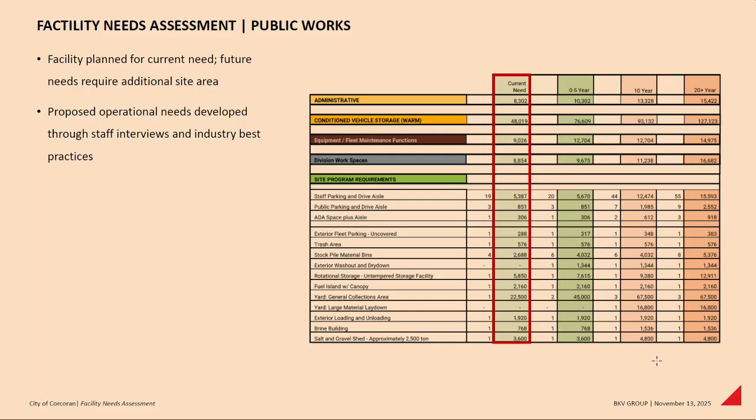We discussed these needs with staff, with Kevin, Joe, Pat, and other staff members to understand what they saw as needs for their facility. This program is really a staff-centered program.

Similar to Public Works, we met with staff and developed growth projections for both their current need and out to 20 years for both City Hall and the Police Department. For our master planning process, we are planning around the 20-year need.

For a combined city hall and police facility, we identified roughly an 86,000 square foot building requirement. There's also an additional cold storage facility for police equipment, which would be about 2,000 square feet.

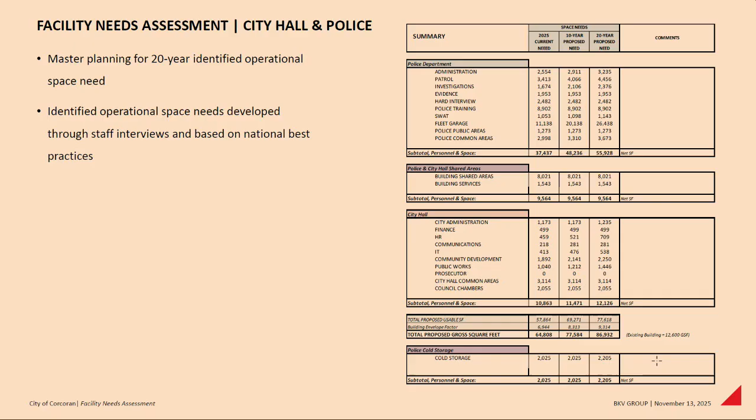Back again on Public Works.

For master planning on the Public Works site, we really looked exclusively at what can be done on the existing property. Within the program, we identified a shortage of about 55 to 60,000 square feet within the facility. The current building is somewhere between 24 and 28 thousand square feet, depending on how you level the multiple storage levels.

That facility was really designed to be just that size. It's served through well, and also through a septic system, and those systems were sized for strictly that building size with fire suppression and water demands. So really the expansion of that existing facility is limited if municipal utilities are not likely deliverable to that site within the life of the property.

So we really looked at a handful of options, but this particular master plan does realize that there is a potential feasibility that the septic field can be expanded to house and allow additional office and personnel demands, as well as there is a feasible possibility that a second well could be on site to serve a newer facility. Because of fire sprinkler demands and building code requirements, it would be best to keep these buildings separate, so we didn't trigger any kind of additional parameters within the existing building.

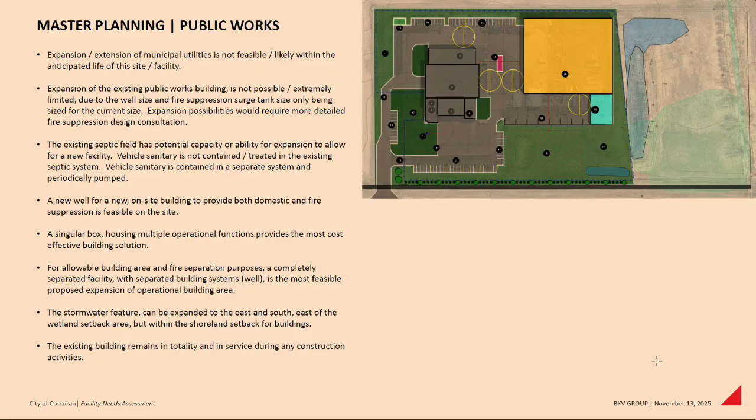So this just captures, could we, if we had all of the resources that we need, make it happen on this? For our bare needs right now, we could, but that's why it's not broken up into all of the different boxes, because we wanted to cover the square footage at a macro level, and then in this next phase, dig into, alright, what do we need specifically? When does it make sense for us to pursue that need? There's one more slide, Jane.

Yeah, so this is just a little bit closer in to illustrate what is existing and then what we would be proposing new. So the big yellow box is that conglomeration of multifunctions, whatever it would be determined. And then also the miscellaneous site functions that would help support that facility in the Public Works and Utilities departments.

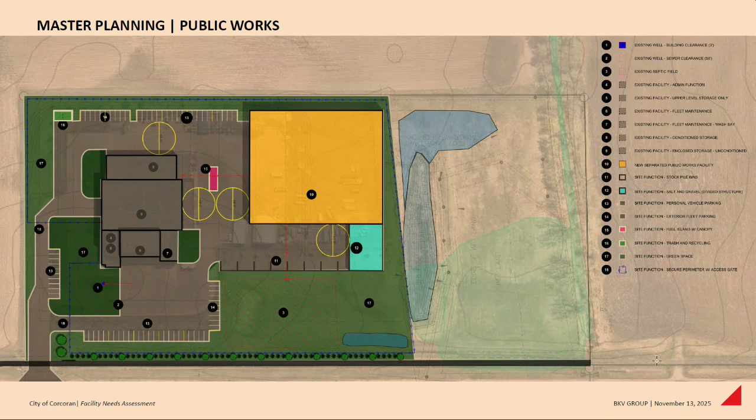Good job adding that. We don't want to leave them off, so great job.

So for the City Hall and Police facility, this is the same master plan you saw previously, but this is one of the two options we looked at, and the one we're proposing moving forward as a recommendation. The second option was over at Heritage Park on the north side. This one is just down the street at the city center.

This site has good access to utilities. It has a great presence within the future development of the city center itself, and also has a nice walkable neighborhood feel to it. The master plan includes a two-story facility with City Hall and Police, and a lower level with a lot of garage space for police and their equipment, storage, support spaces like locker rooms and other storage areas that don't need daylight access.

We're proposing to have some of the public parking facing south, which could potentially be expanded and connected with any other future development south of the parcel. On the north side, we're showing a secure parking lot for staff and police operations on the back side of the site. On the very north side of the building is where the garage tucks under to access the lower level, which naturally follows the topography of the site, utilizing the hillside to slope down to the stormwater area.

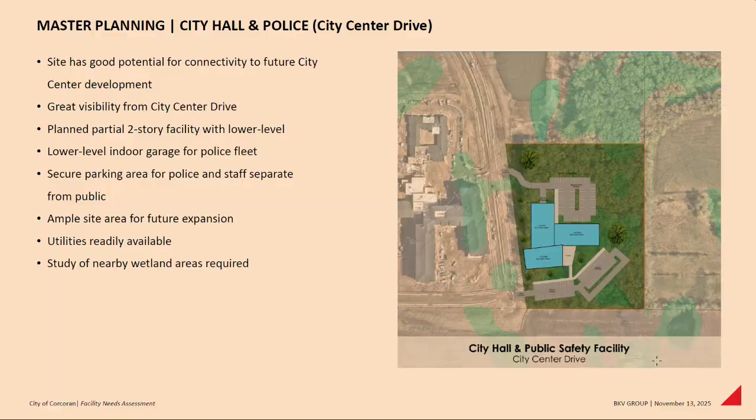We can go to the next slide. It's just a larger view again. We can go to next.

I wanted to remind you that we did look at the fire station, and we were looking at this current site where the city hall is for a future fire station. The site does work well through this feasibility study. We determined it was best positioned on the southern side of the parcel, allowing public access up City Center Drive while still having the apparatus bays with quick response out onto 116.

This shows the opportunity for the fire station to grow to the north. As needs change, you can add additional apparatus bays to store other equipment and response vehicles in that area.

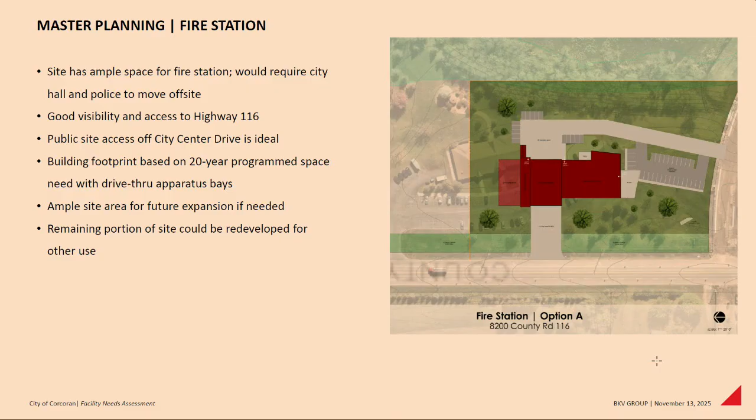Mike, I'll let you talk about the costs if you will. We got Mike Phillips from Kraus-Anderson, he's going to talk about costs. Thanks for the introduction, it's great to be back.

Let me go ahead and pull up the summary budget. Bear with me here one second.

When I was here last time, we walked through high-level budgets for each of the options, starting with the new city hall and police station, to give a little additional context. Working off the space programming you just heard from Mike Healy and Andrew Cooper at BKV, and using past project history at a concept level, which is where we're at currently, we look at space in terms of blocks and certain types, and based on similar project history, come up with unit prices that are typical, then provide ranges for that.

So what you're seeing here is the midpoint of those results. To that third bullet point about soft costs, we price the hard construction costs as well as the total project costs, which include soft cost items such as design fees, construction management fees, permits, inspections, utilities, and all of those sorts of things. So you're looking at a holistic project budget.

For the new city hall and police facility, that's approximately an 87,000 square foot facility with anticipated site acre impact of roughly 3 to 4 acres. You can look there at the line: construction costs are projected at just north of $40 million, with soft costs approximately $8 million. Anticipated total project cost in 2025 dollars is 48.5 million, and you can see the anticipated escalation below that for 2026 and 2027.

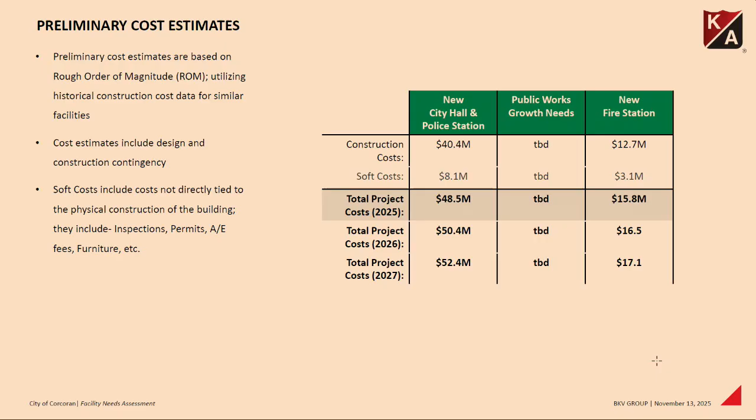All right, Paul Michelle, partner with BKV Group.

Part of the packet is our proposal for the Phase 2 services, so I'll summarize what those are. We're going to start refining what those needs are relative to what funding can be achieved for the City Hall, Police Department, and Public Works project. We'll go through a visioning exercise and develop concepts, which could be more refined site diagrams, site test fits, conceptual massing, and what the vision of the building could be. Not necessarily a final design, but as we look toward community engagement, you'll need materials to inform the public of what's required and what they could be deciding upon.

Validating the City Hall, Police, and Public Works space needs is the first step. Then refining what the master planning approaches would be, how you might phase the work to meet various budget thresholds, what those concepts could be, and then really engaging with the community. We had a total of 7 community engagement workshops as part of that, in order to work with the public and solicit their feedback. We can take that feedback and refine the final results of Phase 2.

Developing the implementation schedule and financial plan is the last part of that. Ultimately, through the community engagement, education, and materials, you want to present a picture to the public of what the investment will really look like and what they would be getting for that investment.

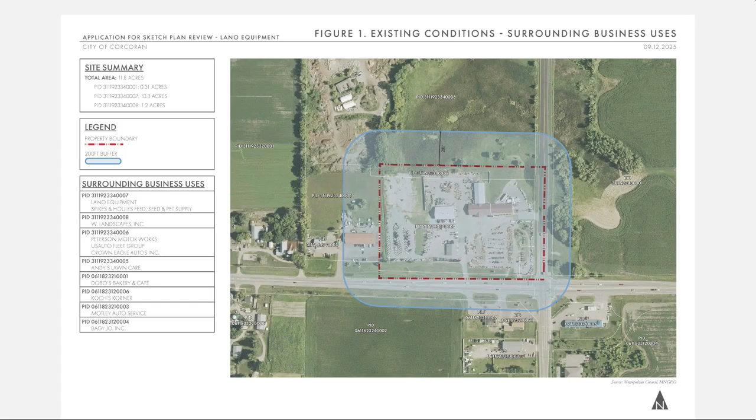This slide is a good one because it shows the property to the north, and they would acquire a portion of that property. So they would plat that property with the two properties they own and create a new parcel for Lano, and Spike's down to the south.

Next slide. That blue circle shows the 60 feet they would acquire from the property to the north, resulting in an 11.8 acre site when they're done. So the new building is in the southeast corner.

It's a 54,800 square foot building. And then in the center of the site, there's an existing 6,600 square foot storage building that was approved in 2013. And around that is about 4 acres of fenced outside storage.

There's parking on the southwest corner. That pond-looking thing is the septic system. There's another septic system on the north near the stormwater pond. And then in the corner of the site at 19 and 55, there's some additional parking up against the building and then a display area.

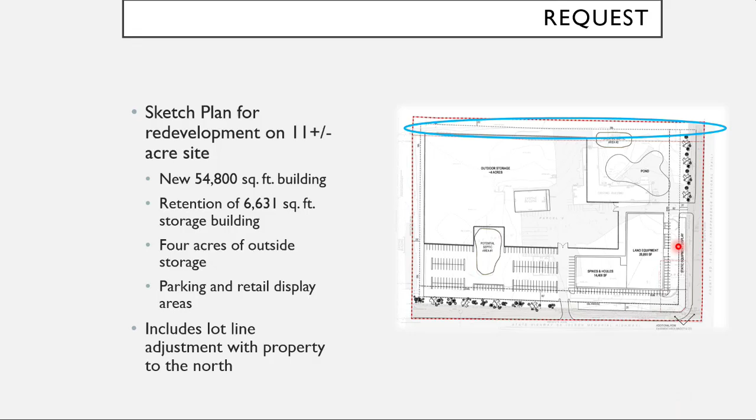We'll talk about each of these individually through this report. So the business is a legal non-conforming use. Businesses similar to this have operated on the site for decades, and when Lano purchased the property in 2005, they came to the city and got a letter acknowledging the legal nonconformity of the use and some of the constraints that existed, discussing with Brad Lano and his attorney what those constraints were.

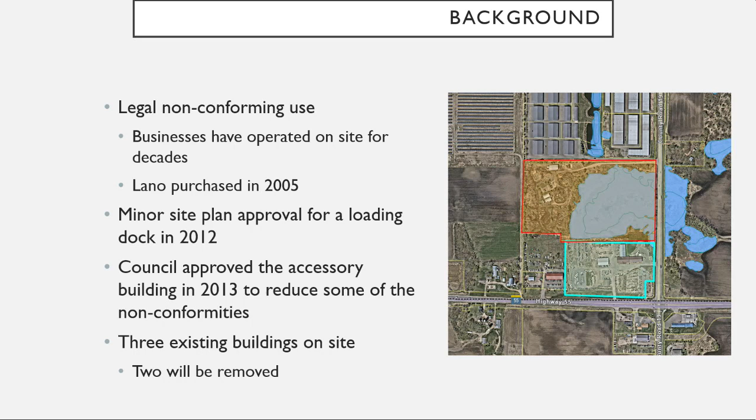In 2012, there was a site plan approval from the city for a loading dock expansion north of the building. Then in 2013, the accessory building was approved, in part to reduce some of the nonconformities, because building that building would allow them to move some of the things that were outside into that building. That building will remain with this new redevelopment proposal. The two other buildings on the north side of the site, south of the storage building, would be removed.

Next slide. The property is zoned C2. C2 is intended to provide for a variety of retail businesses. Retail sales are permitted, which is what is happening at the Spike and Houles business. But equipment sales, repair, and outside storage are not allowed, which is what's happening at the Lano business. So it's allowed to continue in the way it was in 2005, and then modified in 2013, but could not expand. Those uses would be allowed in the light industrial district.

In the staff report, I talked a little bit about the unique mix of uses, and there's a couple ways to deal with that. The applicant could move forward with a zoning text amendment to create a new zoning district, or modify the C2 district to allow outside storage and equipment sales and repair. That doesn't feel like the right fit for a retail site.

I actually can't think of where I've ever recommended this, but perhaps a PUD in this case might be a better solution than creating a unique zoning district, because at the end of the day, that's what a PUD is—it's a unique zoning district. Next slide. So the concept plan would house both businesses in a single building, similar to as it is today, but does allow them to expand and modernize their businesses.

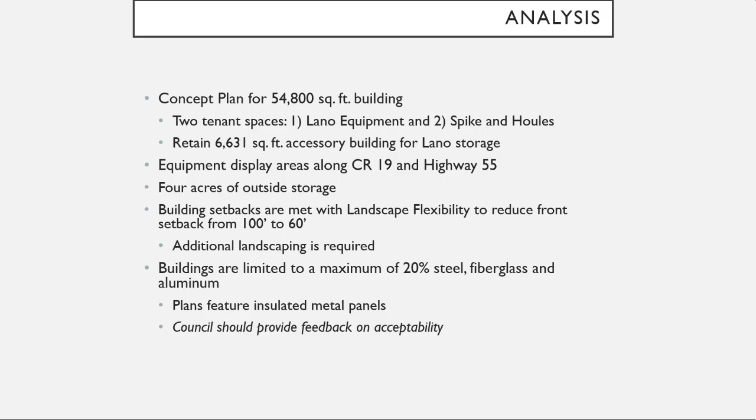The building concept is included in your packet. I wanted to highlight the fact that buildings are limited to a maximum of 20% steel, fiberglass, or aluminum. The plans feature insulated metal panels, which is something you've seen in a couple of other PUDs. I think this is one where it warrants some feedback from the council about whether that would be supported, and I have some imagery on the next slide.

So this is the site plan again, and this is some imagery that's in your packet. Much of the building is a flat metal insulated panel — kind of a modern-ish construction method. There are some ribbed panels shown on these concepts, and again, these are not final drawings by any means, and the applicant could maybe provide more feedback.

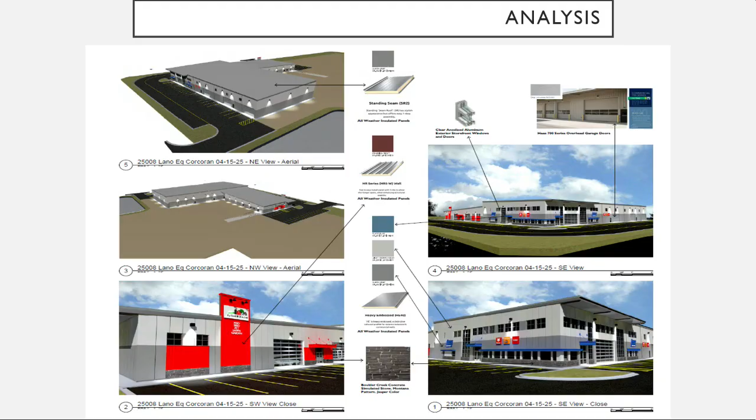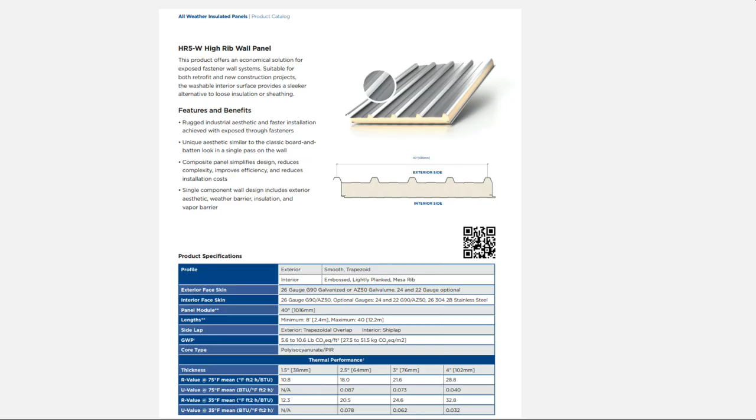The next slide is not in your packet, but provides some information, and some of you may have looked at this about what it is — it really is a metal face with an insulated material. Compared to a typical agricultural building metal siding, this is a little bit different. This is the ribbed panel I'm showing; they also had some flat panels, and the applicants are here to maybe talk more to that. But I think that's an important element because it does not technically comply with our code today.

For parking, the applicant's plan provides 210 stalls, where 206 appear to be required — again, concept plan level, so there's a lot of finessing that would need to be done. But the code requires that all parking and sales display lots must be asphalt or concrete with concrete curb. I'll just mention that's an improvement from what there is today, since as you probably know, that's gravel today.

The parking and display areas do not meet the setback requirements along either 19 or Highway 55, and in fact the display areas appear to be on or in the right-of-way. Our code allows the applicant to reduce the 100-foot setback to 25 feet from the property line, but does require that same additional landscaping you're familiar with for the reduced setback.

What maybe is a little bit different for this business than some other businesses in town is that display area is a critical part of their sales business, and so the council should discuss any potential for PUD flexibility if they go that route regarding those landscape requirements, which are fairly significant in order to get that reduced setback. But when you look at the 11, 12-acre site, it does seem very feasible to shift that building to the northwest 25 feet to comply with those setbacks.

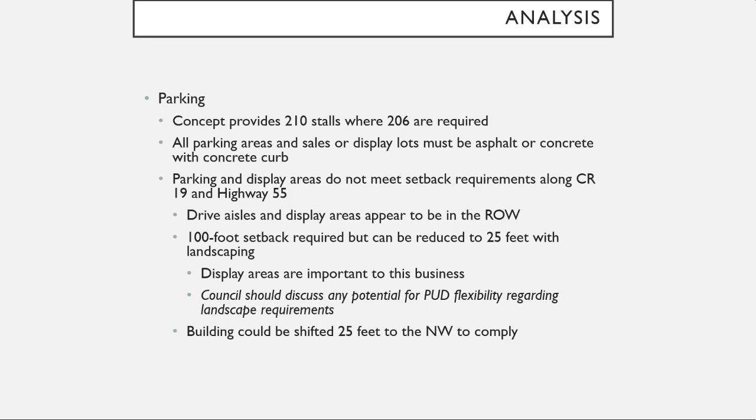So council should weigh in on those setback requirements. That would allow it to fit within the reduced 25-foot parking and display area setback. Because again, the display is really at the property line, so we'd need to move that to meet the 25-foot setback.

Regarding access to the site, public safety has noted that they have some concerns and just need more information about that storage area. They need to be able to ensure there are clear drive aisles for public safety. The areas of outside storage are pretty significant, and should there be an emergency, they need to be able to get in and turn around in there. So we'd need some details about how that would be set up if this were to go forward.

In your packet we got some informal comments from Hennepin County, and they generally don't need anything — the right-of-way is adequate, they said, and the existing access is acceptable. We did send plans to MnDOT, not required at the concept level, but we know there's a lot going on in this corridor. Plans show removal of the eastern Highway 55 access and retention of the two western access points, and I'd note that plans are subject to review and approval by MnDOT.

We haven't done a lot on Highway 55 as a council, but we did talk about this with Pioneer Trail. I would just say that while MnDOT can't require dedication of right-of-way as part of a plat or subdivision, we do want to plan for that. So we really want to think about what setbacks we're requiring. If MnDOT were to say we're going to be planning for Highway 55 improvements that would require 50 feet of additional right-of-way, we certainly don't want to be in a position where the applicant makes improvements on the site and in a short period of time MnDOT has to come in and remove those.

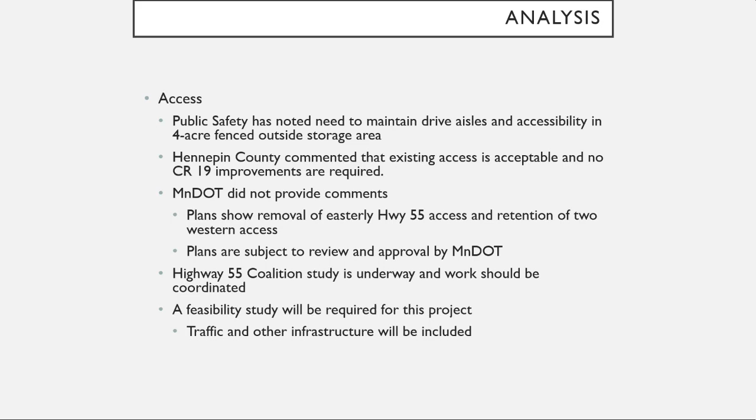Landscaping is an important part. The landscaping is really not a part of what they submitted. They submitted a landscape plan that did not come close to complying. But certainly on 11, 12 acres, there's plenty of room to meet the ordinance requirements.

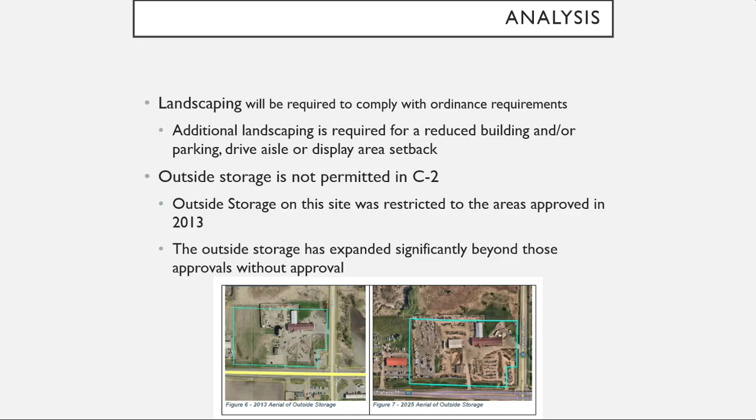As I said, outside storage is not permitted in C2. The retail sales is not either. I just mentioned that this was in the packet, that the outside storage has expanded dramatically from what was approved by the city in 2013. So this is an opportunity to once again try to bring the site more into compliance with the regulations, whether that be a new zoning ordinance or a PUD.

The site is in the MUSA, the Metropolitan Service boundary, but this is our wastewater study area. As you may recall, the southwest part of the city, we had plans since for more than 20 years to provide sewer and water to this area.

Things have changed, and the Metropolitan Council is studying this area. We had hoped we would have results of the study before we kicked off the next comp plan round, and we're still discussing that with them.

As a result, sewer and water is not yet available, so a variance or PUD flexibility would be required. We've done that for other businesses in this district. The plans do show a primary and a secondary septic site.

As a reminder, as part of a preliminary plat submittal, the applicant would need to get preliminary approval of those sites from Hennepin County so that we can ensure that those sites are sized right and in locations that will in fact meet code requirements.

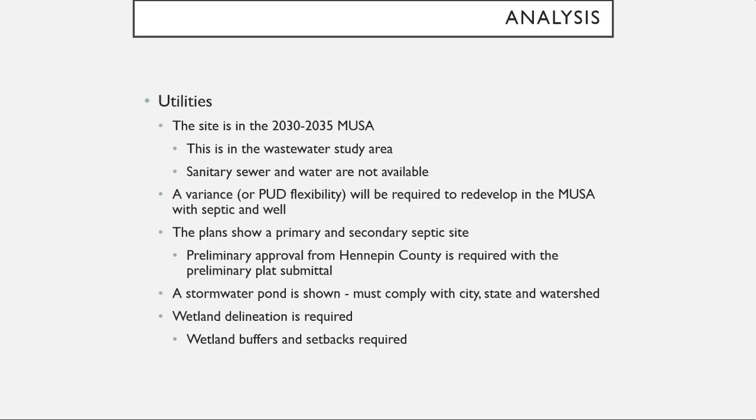And again, as part of any plat, wetland delineation is required, wetland buffers and setbacks would need to be provided. It appears that those are really on the north property line for this site, where they're acquiring property from the adjacent landowner to the north.

Their plans indicate that there's some sort of an easement on that 60-foot piece. We don't see a record of what that is, so we're looking forward to working with the applicant to determine if that is a private or a public easement. If it's a public easement, it would need to be vacated as part of this project. At first glance, we don't see a reason for that to be a public right-of-way, so we just need to determine what that is with the applicant.

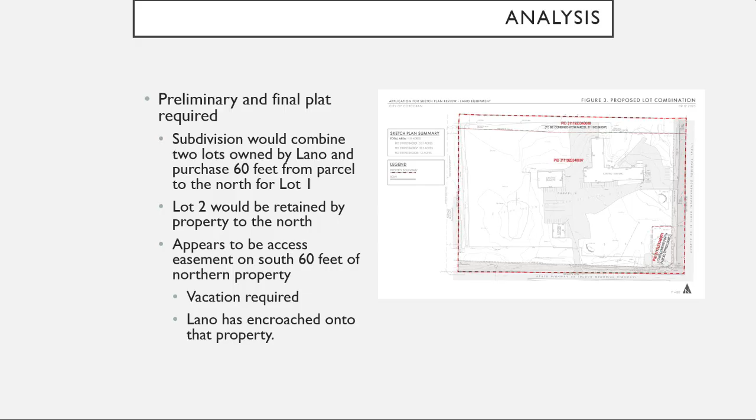I think the reason that is part of this project is over time, if you look at the aerials, you can see that the project has crept into that area. So this, again, formalizes things and allows them to bring the site into compliance with setbacks.

Next slide. Again, just to recap, this is the concept plan that they've submitted. They're here tonight to get feedback on the concept plan.

Next slide. This is a legal non-conforming use. The outside storage does not have those protections because it's expanded beyond what was permitted when they moved into the site. But redevelopment provides an opportunity to bring the site into compliance.

And there's a couple ways to do that. I think the staff's recommendation is that the most clean way to do that is through a PUD, which would mean step one would be to hold a neighborhood meeting on the PUD. Step two would be to rezone to PUD with a preliminary development plan and plat. Step three would be the final plat, final PUD, and easement vacation. There is an alternative where they could ask for a zoning ordinance amendment and address the mix of uses that way, which would eliminate the need for the PUD, but I don't know that that's a cleaner path.

Council may wish to provide feedback. I know we're not big fans of planned unit developments, but there's some challenges on this site, so it's worth some feedback on that, as well as a couple of other things I specifically highlighted, and as always, other things you wish to provide feedback on. The applicant's representative is here with, I think, the property owners, so if you have questions, I think they'd be happy to answer those. Great, thank you.

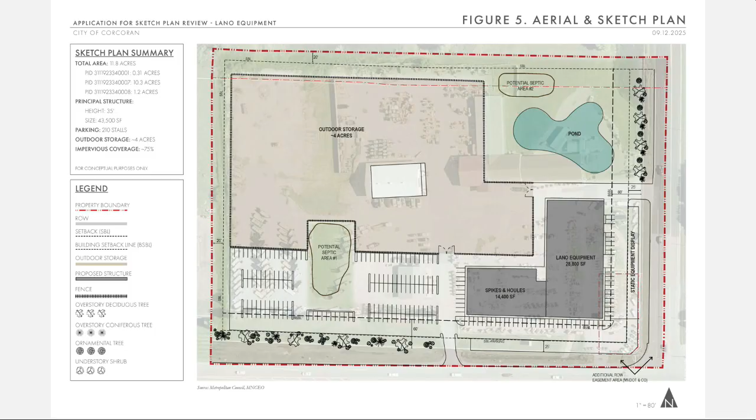We have 2 items. The first one is 9A, which is Elm Creek Watershed Alternate Commissioner Appointment. Dean and I interviewed 4 candidates. We had 4 really good candidates, which is great considering that we had a commissioner on there for, how long was it, Ken?

A couple decades, yeah, a long time, and so it's not really something that we had a bench for, and now to have that level of interest, I think is huge. Dean, did you have anything you wanted to add? I don't - it was great to talk to all 4 candidates, so our recommendations are there.

So I think we were going to recommend appointing, and I don't know if we need to decide the alternate commissioner order now necessarily. Our plan is if you selected 1 or 2, we would bring a resolution at the next meeting. Staff and legal recommend identifying an alternate in order. Just with multiple, it's allowed to have multiple, but if all 3 went to the public meeting, we needed to designate who's the vote. We get 1 vote, so if 1, 2, or 3 showed up, we need to certify an order of who gets the vote.